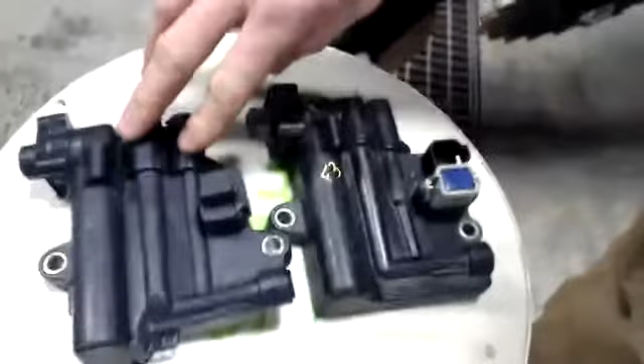So I first want to start here, if you can zoom in, Clint, on these. We've got a regular HD here and an HD Flex module here. And so just real briefly, the difference is you can see that it has an extra plug here, this blue plug.

So the Flex module would give it the capabilities of going to a side dress bar or a sprayer, potentially if you weren't applying too high volume. And so it has an SRM built into it that serves as an SRM when you are on a side dress bar, for example, or a strip till bar.

When you move this Flex module to the planter, it no longer operates as an SRM, it just operates as a simple HD. But in the side dress or strip till bar situation, this blue plug would come out and you would use this as an SRM as well. So on the planter, they just operate as a liquid module. Both of them would be universal with each other. You could swap them out like that.

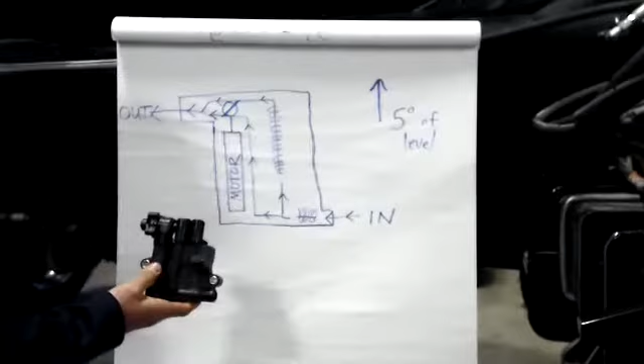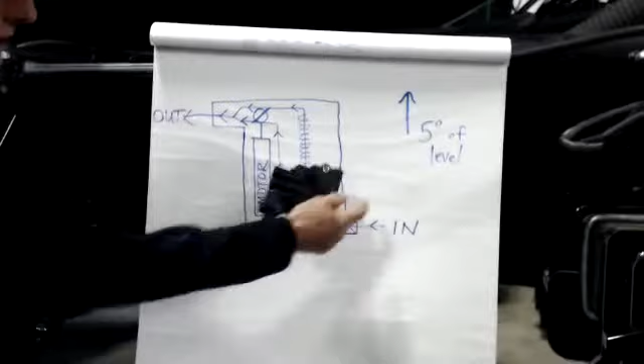I drew an internal diagram just to kind of give a little picture of what these HDs are. So here I drew on the paper the inner workings of an HD. So it would sit on your planter like this, and I wrote a note up here that they are directional, meaning that they have to be within 5 degrees of level for them to work correctly when they're installed and running on the planter.

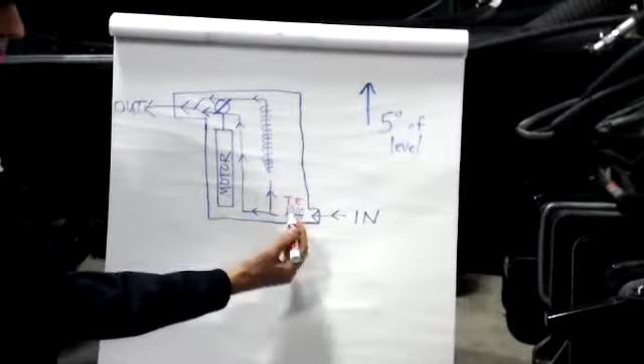So, mark real quick here. Your liquid is coming in on the bottom, and this is a flow meter. We call this the total flow meter, so I'll write TF here. And then that's a turbine, and that's an accessible part. You can replace that if it gets jammed or broke.

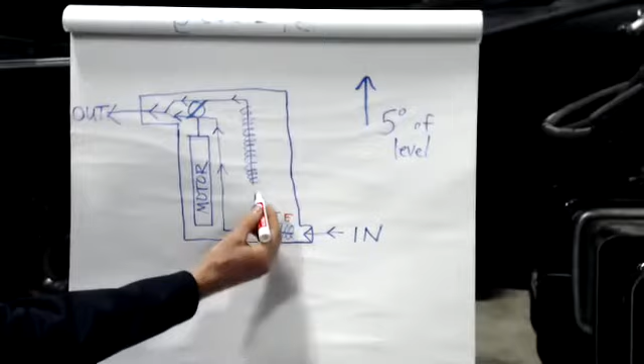Then the liquid has 2 channels. It normally comes up this way, and this is the low flow meter. The liquid will go through the low flow and then out the exit.

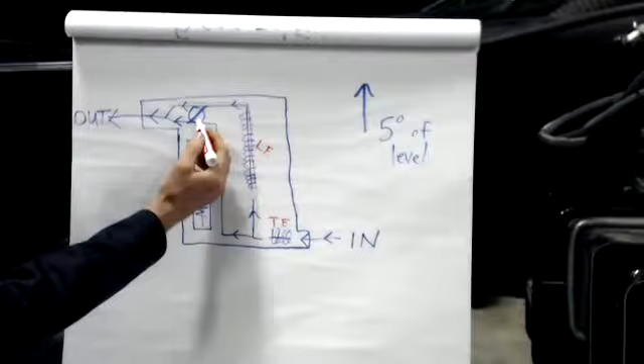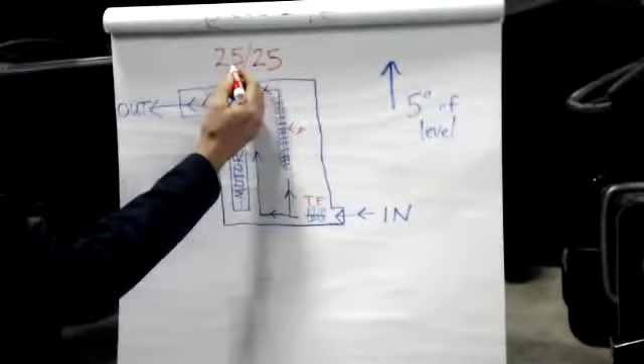This motor in here, this 12-volt motor, has a ball valve on the top of it, and I'm going to write that 25, and we'll see later that this comes to be important. The commanded ball position and the actual ball position. This 25 is kind of a magic number.

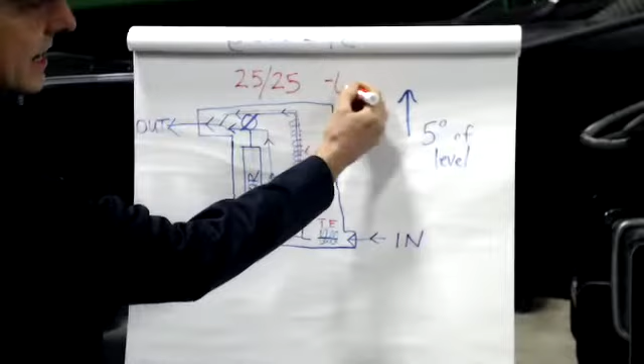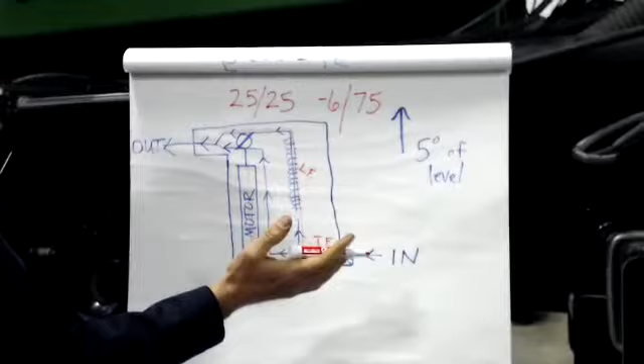When this ball position is at -6, that's off, and 75 is wide open. Why they didn't make it 0 and 100, I have no idea. That would be way too easy to remember. But it's -6 is off, maybe -5, -6 is off, and 75 is wide open.

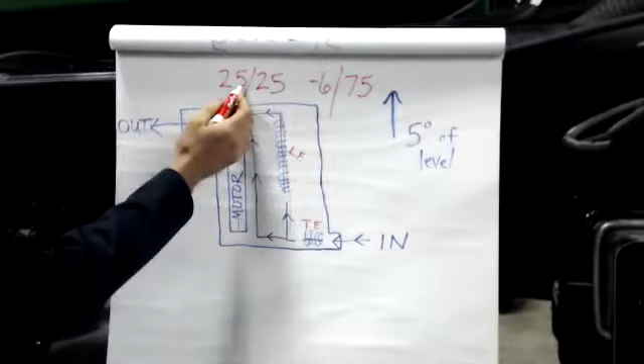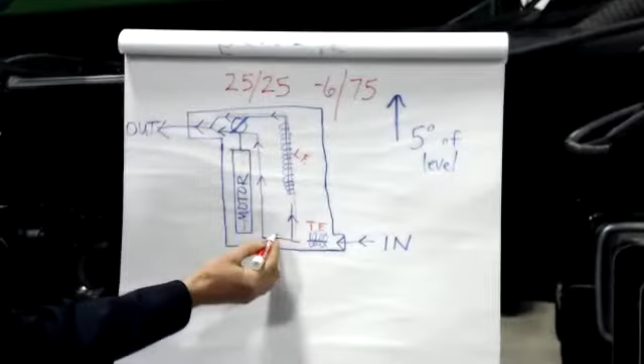So when this ball position gets to 25, as long as it's below 25, this is the path of the fluid, going past the total flow, past the low flow, and out. Once it gets to 25, this ball has an opening that starts to accept liquid through this high flow channel, and the liquid will be coming actually through both channels at the same time, coming together and then out.

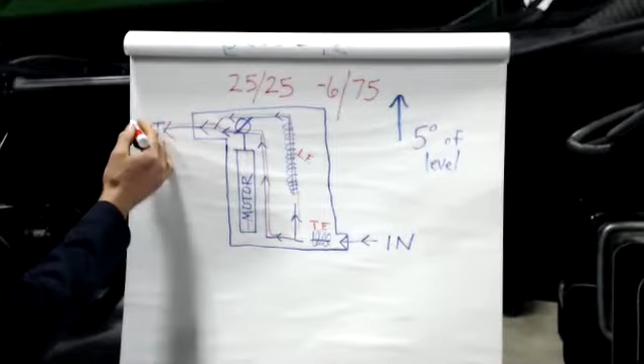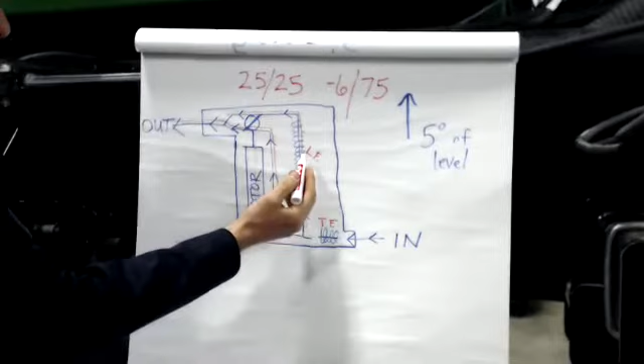So you'll see where this 25, and we run some scenarios on the test stand, where you can still operate, depending on your rate and speed. If you have a blocked low flow sensor or a blocked total flow sensor, it will still allow you to operate, and it all revolves around this 25% magic number.

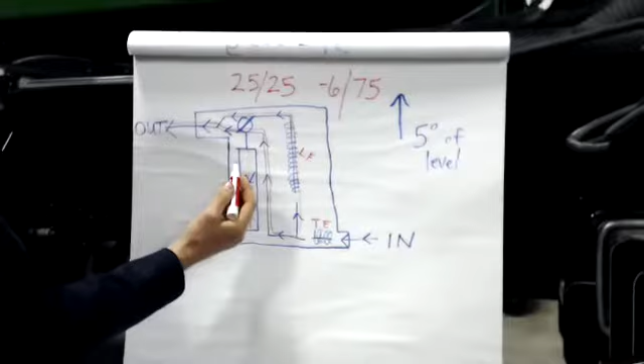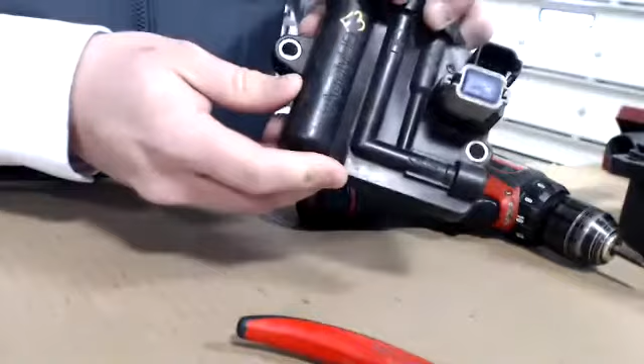All right, so in this picture you can see the arrow of flow. So my inlet, as Aaron just spoke about, this is the total flow turbine that's inside of here. And we'll just pop this collet off.

And inside, we take this little tool that comes in your base kit, and there's a little O-ring in there that we're going to pull out. And then inside of there, we've got our total flow turbine right here. So this little guy sometimes can get plugged up, and as we'll walk through in the diagnostics here in a little bit, really just washing this thing off with some warm water and soap.

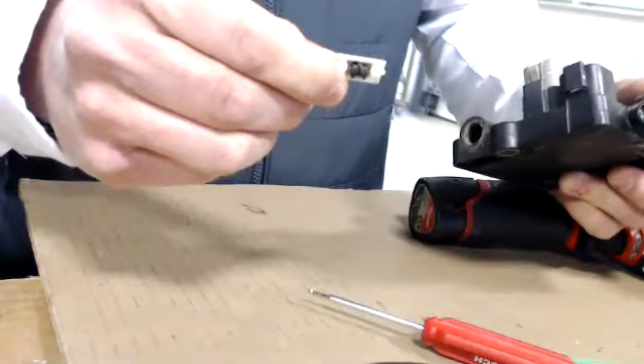Do not blow on it. You don't use compressed air on it. Just a light washing, and that should clean up pretty easily.

I'll also mention these are white. The early ones, I believe, were either black or brown. They're black. And those, if you have brown or black ones, they should be discarded and use these white ones. And also, you're not going to see it in the video here, but they are directional. So there's a little arrow on there, and that's the way that you insert it, the direction of flow.

So we'll just slide that little guy back in. These Deutsch tools, this is actually a Deutsch connector tool. You can buy them on Amazon or eBay. It has a little hook on the end, which you could make out of a screwdriver if you wanted to grind that on there yourself. But that little hook is really, really handy for servicing these HDs. So we'll just put that back together and then move on to the low flow here in a second.

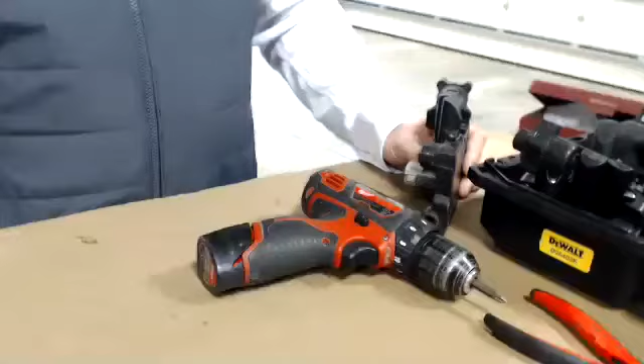All right, now we're going to break open the top of the body assembly. This is this piece right here, screwed down with these 4 screws. It's called the valve body. We're going to pop these 4 screws out to access our low flow turbine along with our motor.

Now when you pull these apart, they come together. Sometimes they come apart harder than others. Be careful not to get fertilizer into this motor cavity. When you pull that apart, there's going to be fertilizer in the channels, and don't drip it into that motor cavity, or there's a rusty day coming.

So inside this little chamber here, you'll see a little - this is the low flow turbine, and it's seated in there, pardon me, there's actually a flat back on it.